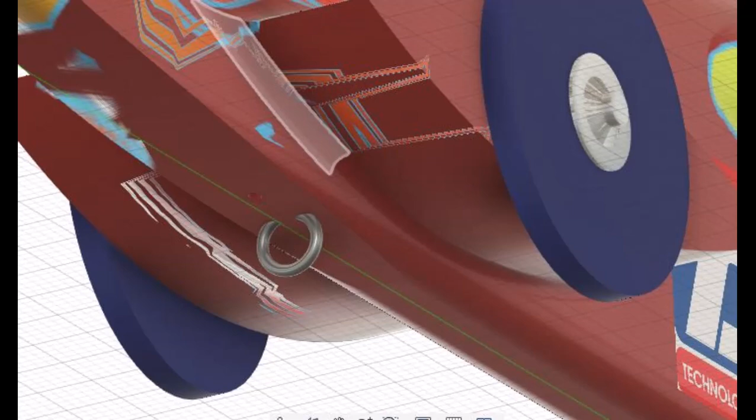But screw eyes are necessary to keep your car on the track, and we have to design these and we have to attach them to our car so when we race the car down the track, it's going to stay on the track and it's going to complete the race successfully. So let's get started.

Okay, now let's start designing that screw eye. So I'm going to come over here and I'm going to hit a new file, new design. And let's go ahead and save it so I don't forget. This time it's going to be 2025 hyphen, we'll say screw hyphen eye hyphen 001. And let's see what happens.

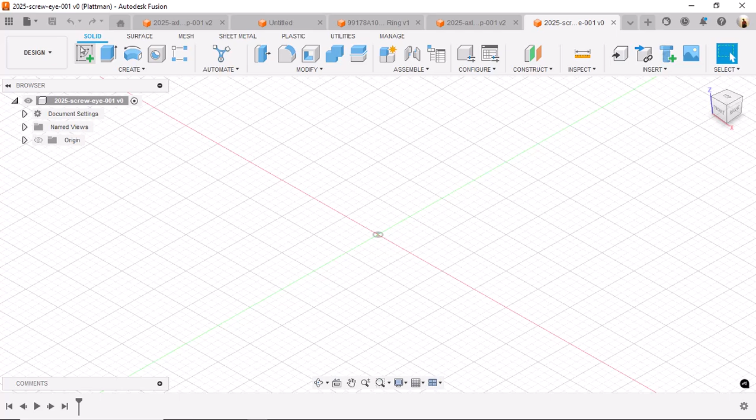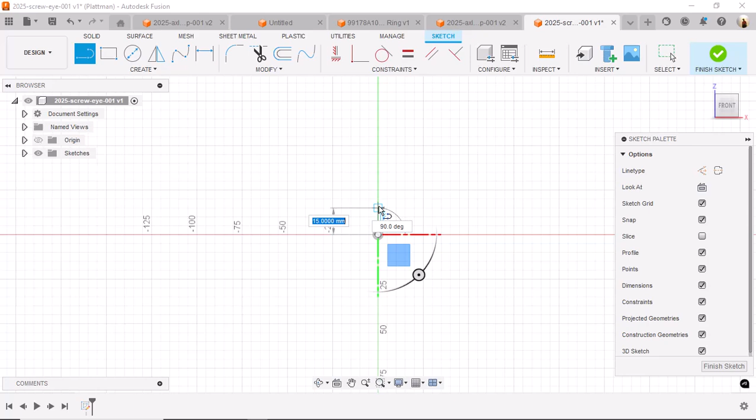Okay, so what I want to do now is create a new sketch. Now, since this is going to be on the dragster and you want it facing forward, I'm going to go ahead and select the front plane right here to start designing. And I'm going to come down here and select the line command. I'm going to select directly on the origin. I'm going to come up and key in 15, so I know it's the distance I need to go.

Now let's roll up on this a little bit more. Let's come down here and select this time arc here by center. And so I'm going to come over here and come down. And so what I'm going to do here is I'm actually going to select a construction line. And I'm going to draw that construction line down here to 2.5 millimeters. Okay. Then I'll go back and get the arc command here.

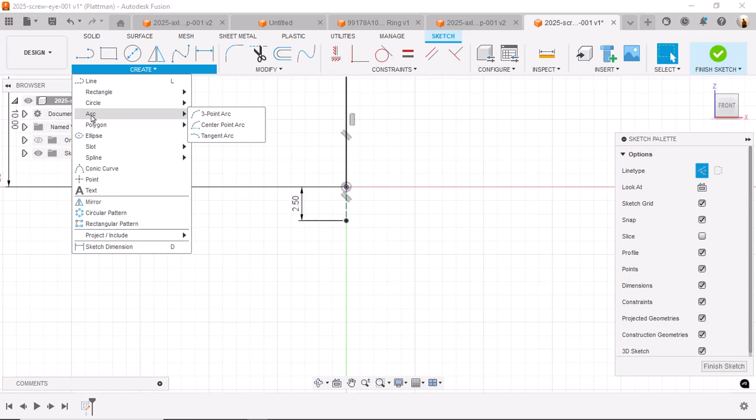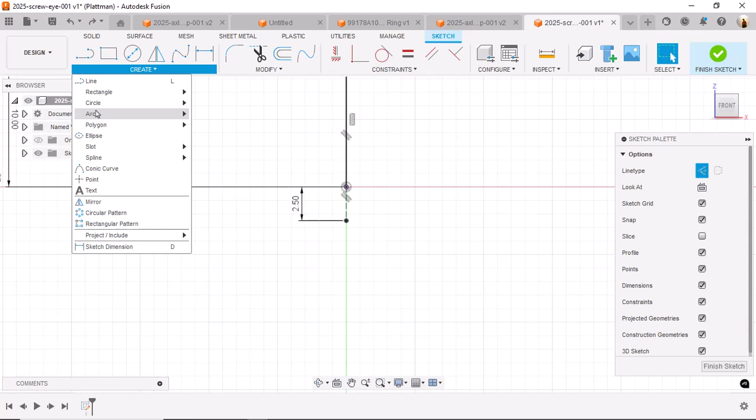And I will do arc by center. And I will select here and come up and click on this, and then come all the way around to here. And I'm going to go ahead and say 350. Hit enter and say I didn't come in right. So I'll go ahead and do a Control Z, and I'll do this again. Hang on, I'll get this right here in a second. I'll show you how to make the angle correct on that. It's not really that hard. I was just trying a different experiment, of course.

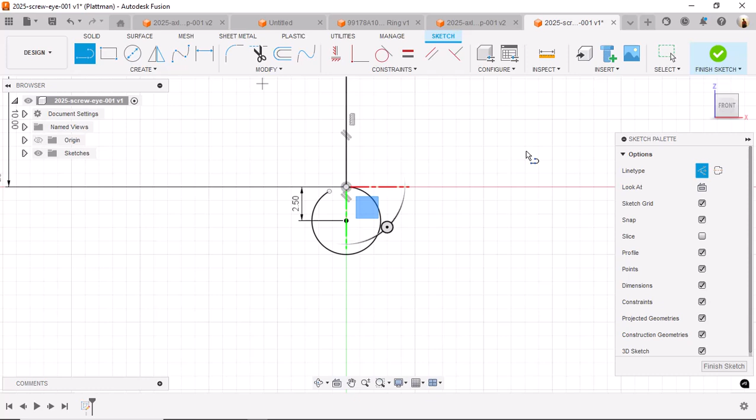Come up here to this. Come all around. I'm just going to stop arbitrarily at that location. Now, the problem is this line is a construction line. So let's go ahead and take it, turn it into a solid line. Now I'm going to go back, click off here, and I'm going to grab another line command. This time I'm going to draw from here up to there somewhere, just somewhere arbitrary. And I'm going to set a dimension by hitting the D key, grab this, and that's at 23.1 degrees. I'm going to say 10.

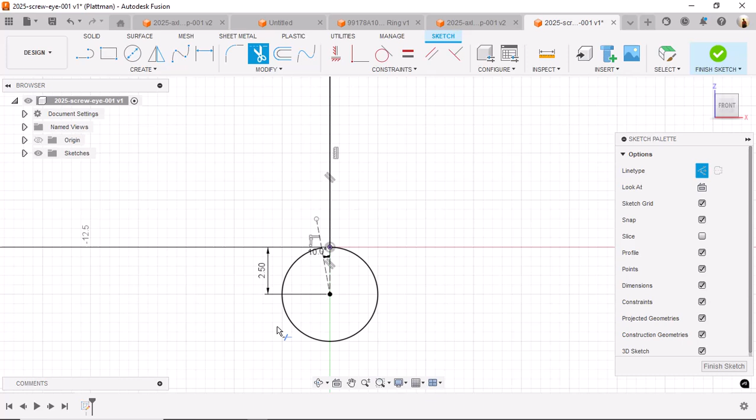And I'm going to do the extend command this time to extend all the way over to that. Now, once I've got it there just the way I want it, I'm going to next go ahead and do the trim. I'm going to trim these two out because I don't need them anymore. Okay, they're gone. Let's get rid of that one too.

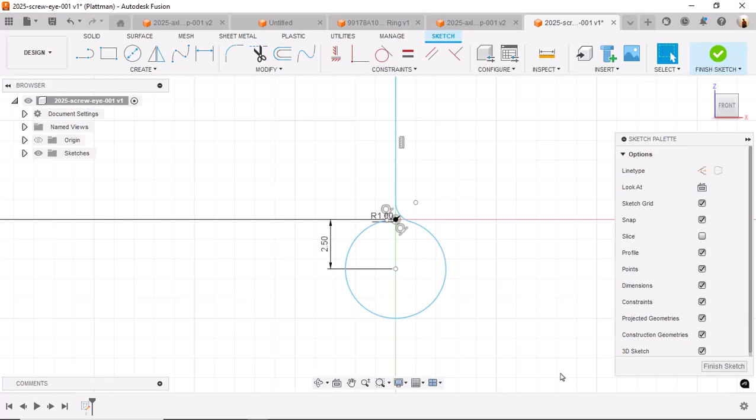Now, I need to put a fillet in, so I'm going to select, let's get out of that real quick. I'm going to select this guy here first, and this guy, and I'm going to select the fillet, and I'm going to key in 1 for my fillet radius. Looks good. And I think the profile sketch is complete. So we've got that complete. Let's go ahead and save our file real quick. Hit save. And now I'm going to go ahead and hit OK.

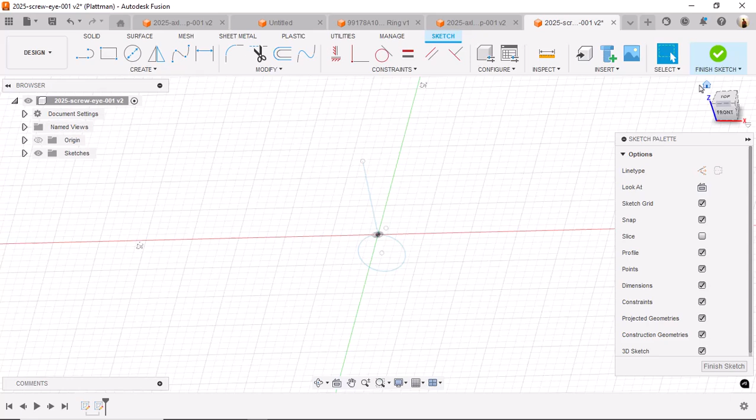And I want to create another sketch this time, except this time I'm selecting the top plane. And I'm going to make sure that this is clicked right here where it says 3D. Got to make sure that's checked on. I'm going to rotate this around. And I'm going to come up and get a circle command here. And I'm going to draw a 1 millimeter circle. So now I have a circle in the quasi top view that's perpendicular and intersects this line going down in the front view. So that looks pretty good.

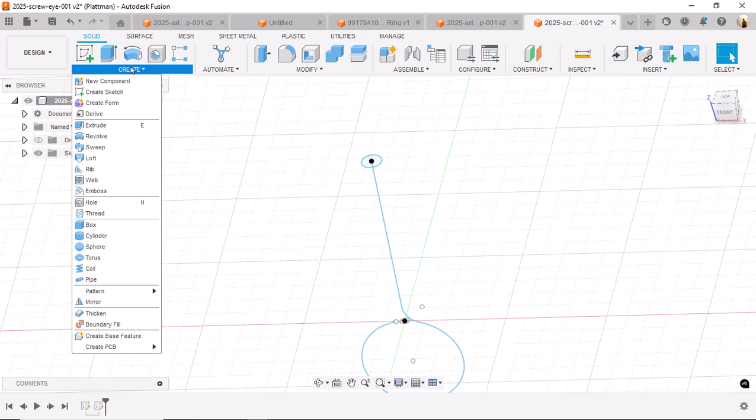Let's go ahead and come over here to create. This time we're going to do a sweep command. So I'm going to select the profile, which is this guy right here. I'm going to select this path, which is this guy here. And lo and behold, it created us a nice looking screw eye.

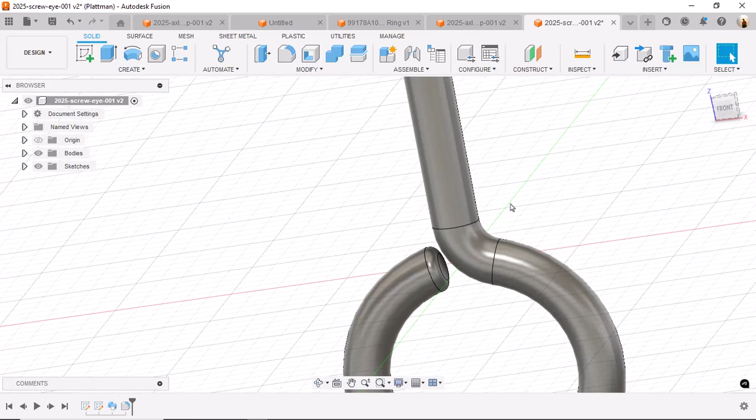So let's go ahead and do some work on this. Let's come up here to this one face right there. And we're going to do a fillet on that. And on this face, I'm going to say 0.2. So it has a 0.2 on that. Nice. Okay, so now let's go up here to the top. Okay, now we got to go ahead and put the point on the top of the screw eye.

Now, many people say, oh, gee, you should go ahead and put your threads in there. It's not necessary to put the threads on the screw eye. All it is just taking extra time we really don't need. We need to be designing our dragster body. So let's go ahead and do chamfer.

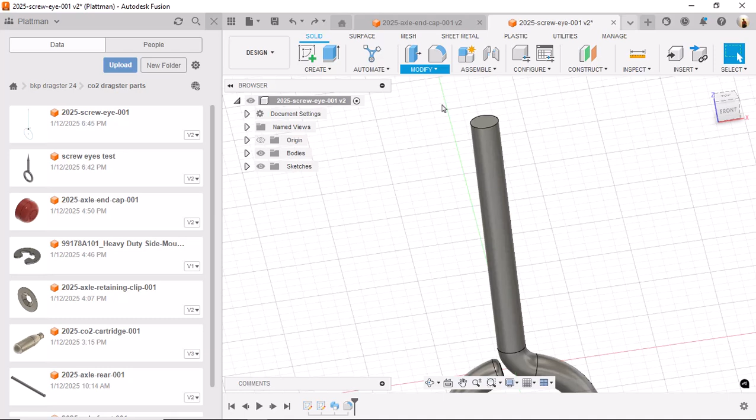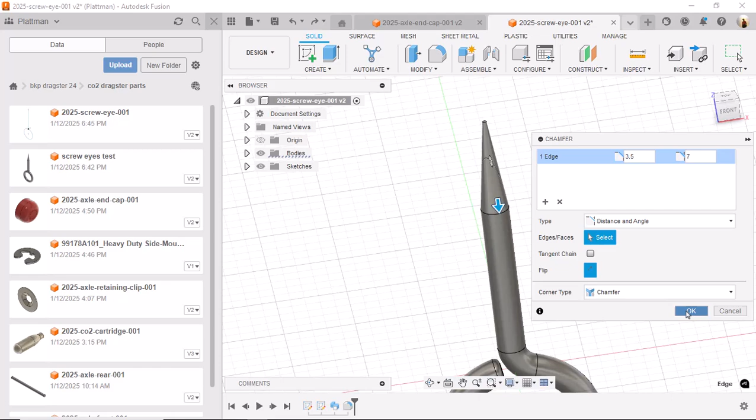Now I'm going to select chamfer, and I will select that one right there. And what I'm going to do is key in 3.5 millimeters, hit the tab key, key in 7, and nothing happened. Well, let's try this. Let's flip it. Yes, that's what we want. That's exactly what we want for our screw eye to look like that. I'm going to go ahead and hit accept on that. Roll out here, take a look at this in 3D, and that's pretty good.

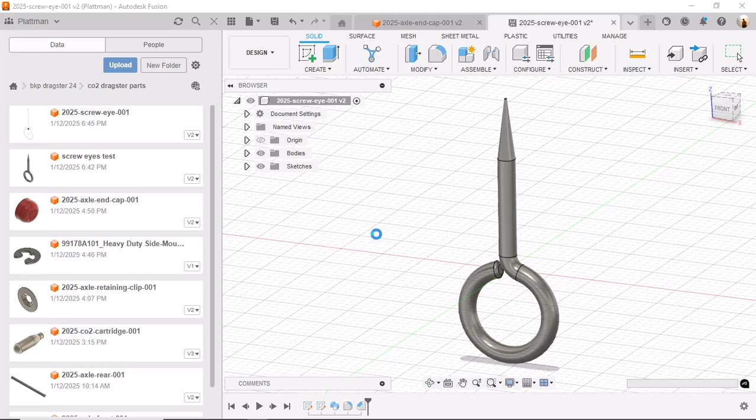Again, there's some people that like to come in and put the threading on this, and hey, I understand that, and that's fine. But when we're really building dragsters fast, we don't have time to do that. Now, if you're going to build several dragsters and you have some extra time over the summer, yeah, then come back in and put the threading on. But right now, you don't need to do that. So this looks good for now. Let's go ahead and save our project. And let's see what we got to design next, which I think might be the dragster front wheel.